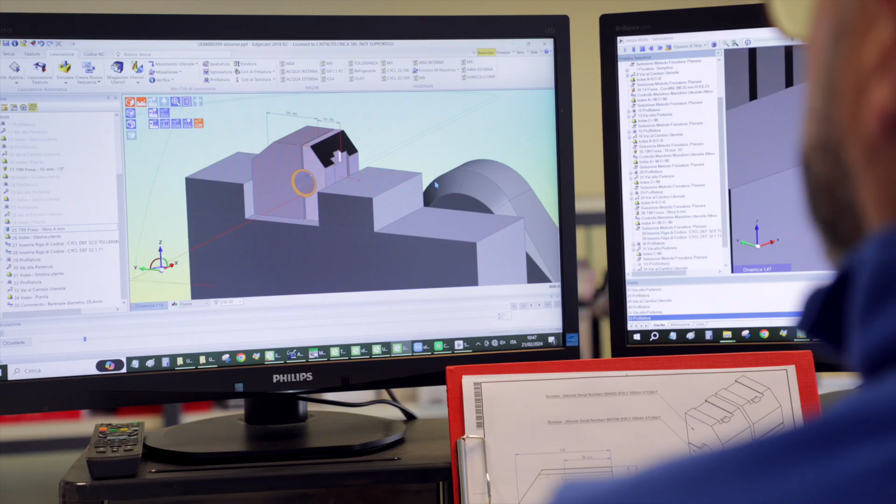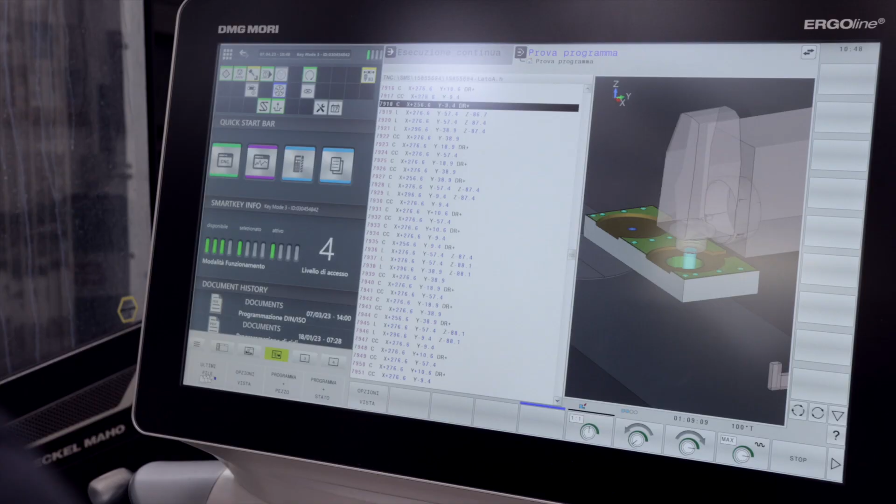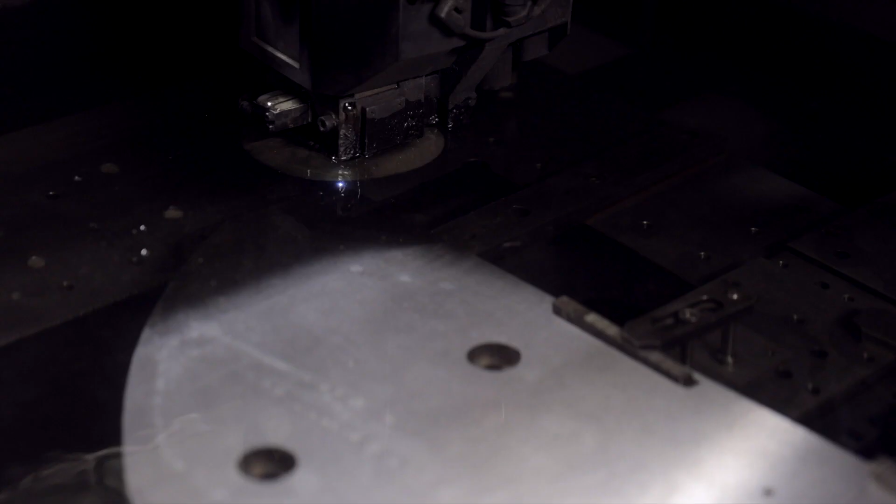We proudly offer a comprehensive array of services. This includes precision milling using 3 or 5-axis CNC machines of varying sizes, turning facilitated by 4-axis CNC machines, surface grinding, section and cylindrical grinding for both external and internal components, wire and sinker EDM machining, micro drilling, and dimensional control of mechanical parts. Furthermore, we meticulously provide test certificates for all our completed projects.

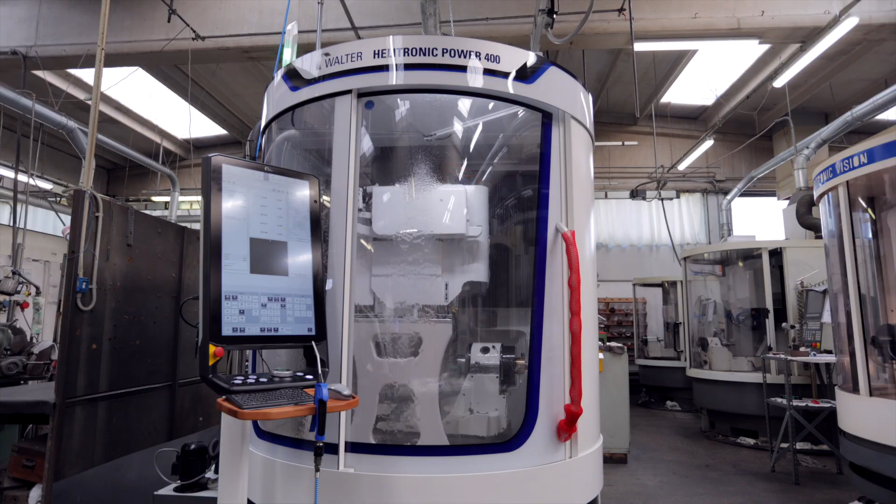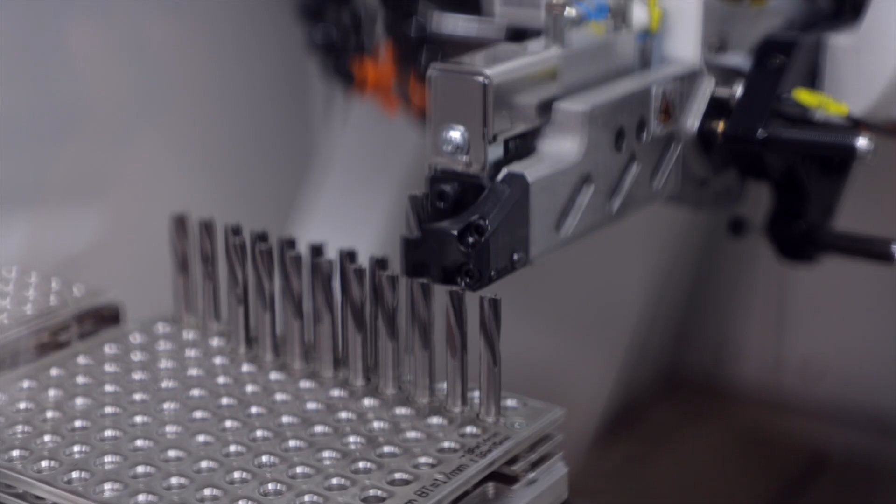Our newest machine produces and regrinds rotationally symmetrical tools in a single clamping cycle. This new machine permits working with a range of diameters from 3 to 315 millimeters. Machining lengths can be up to 520 millimeters and weigh up to 50 kilograms.

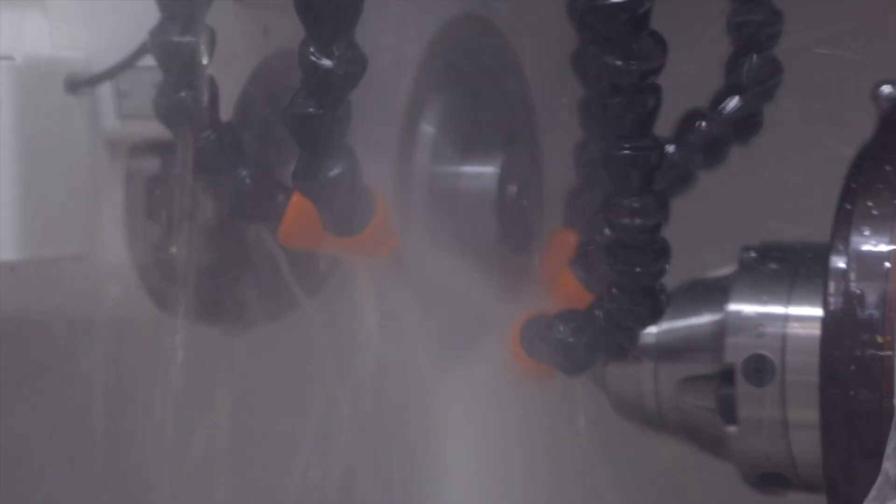CORE helps us make your production fit for the digital future and establishes the technical foundation for this and other IoT and data applications.

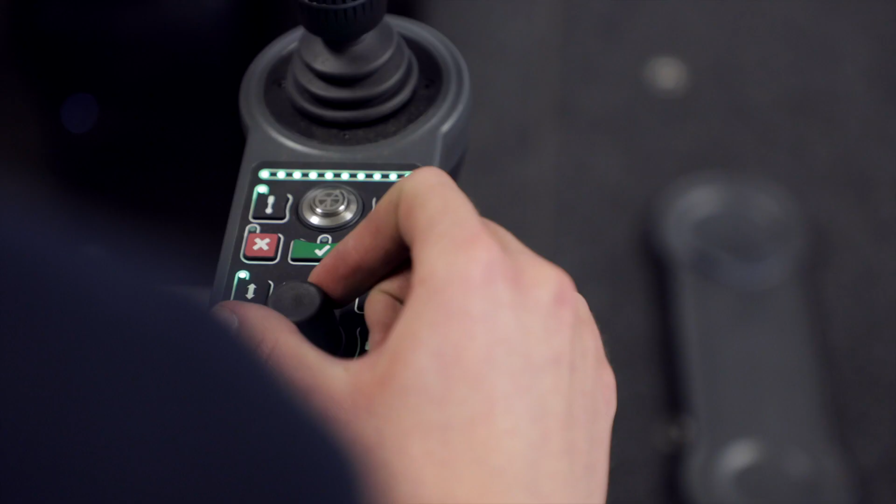Driven by a passion for excellence, we live in the present, keeping an eye on the future, with our team and our over 2,000 square meter resources at the disposal of our valued customers.

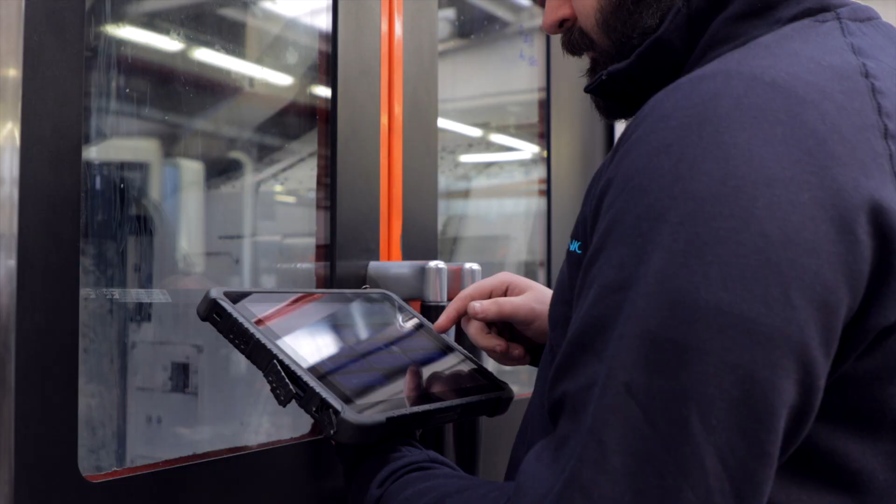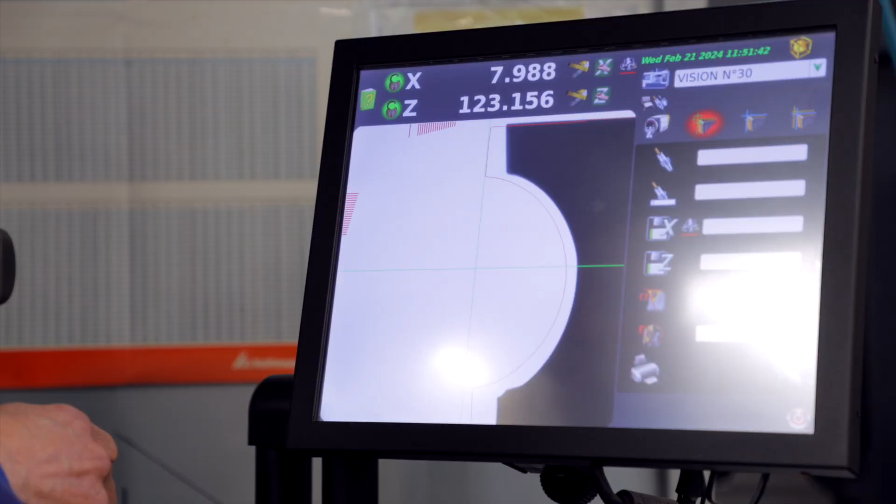We handle small and large orders with equal efficiency and high-quality product to give solid guarantee of reliability for the customer.